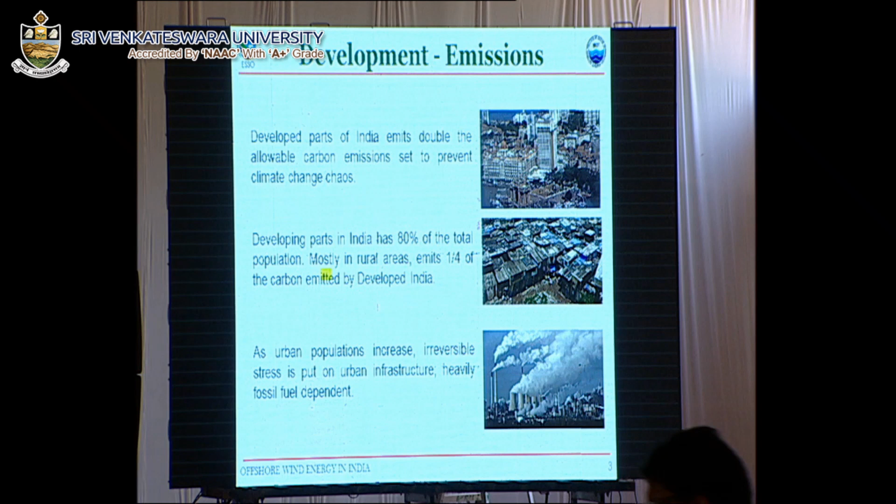This shows the present power scenario in India. We have almost 306 gigawatt. In fact, these numbers are taken from standard reports of MNRE and other places. As far as renewable energy is concerned, we have 44 gigawatt.

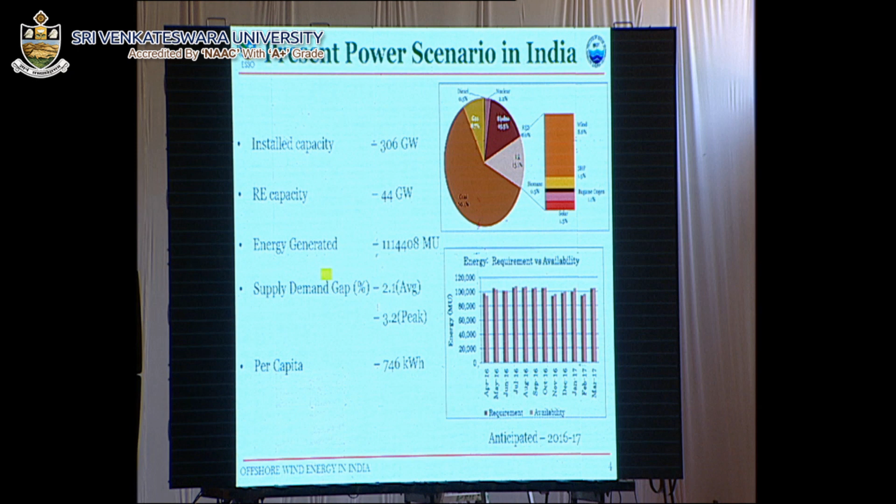But if you see the pie chart on the right, coal contributes maximum, whereas renewable energy comes around 13.4%. Within that 13.4%, wind constitutes 8.6%, small hydel power plants 1.5%, and bagasse cogeneration from sugarcane makes up the rest.

Of course, hydro also is in second place. The per capita estimate we have, I think all taken from there, is 746 kilowatt hour.

Renewable energy is a sustainable energy source that comes from the natural environment. If you see some of the benefits of renewable energy, it exists perpetually and is abundant in the environment, ready to be harnessed, inexhaustible. It is clean and an alternative to fossil fuels. It can be derived from and easily replenished resources.

One important factor for renewable energy - why we need to go for it - is well talked about, whether in the blue economy or elsewhere. A study by IIT Bombay shows clearly from the global climate model that wind intensity has increased over time, showing a positive outlook for how wind will be a great source going forward.

Tamil Nadu's power consumption is very high during summer months, and that's exactly when we get good winds, meeting the major power requirement of Tamil Nadu from wind, especially during summer. Looking at renewable energy capacity, wind constitutes 58%, with solar PV as the major thrust, but wind still plays an important role.

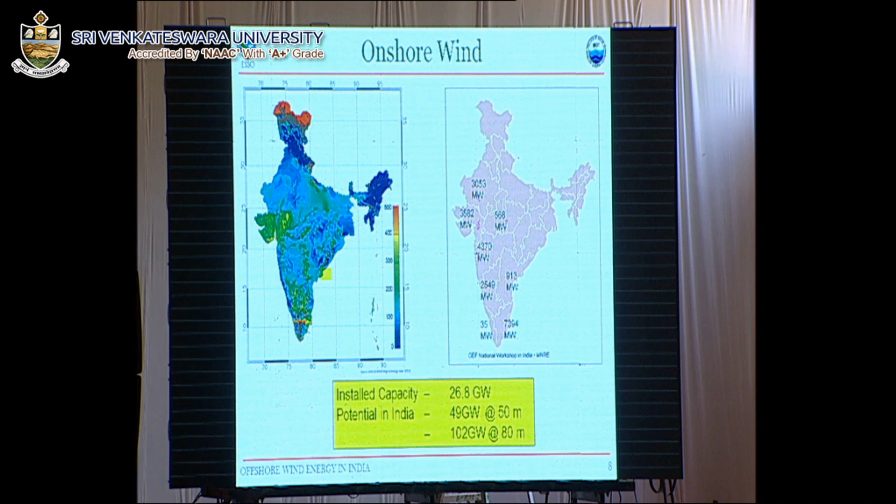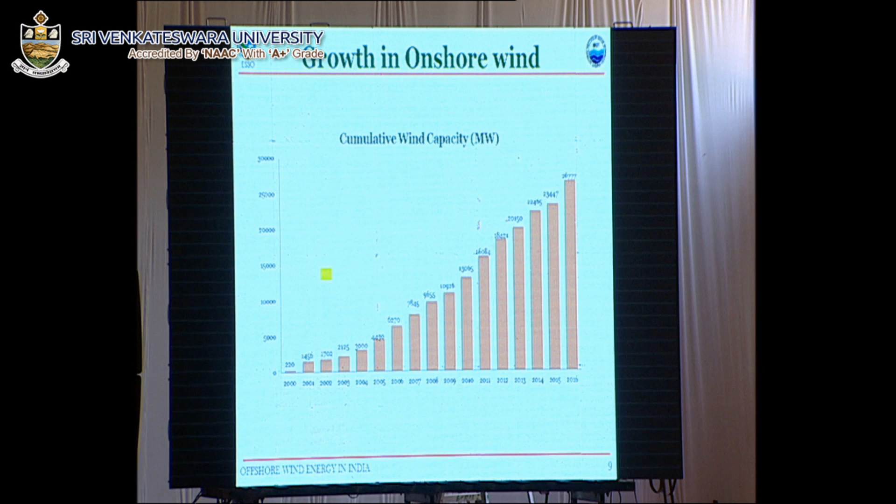Coming to offshore wind - it's already been mentioned that it's less turbulent. One important feature of offshore wind is that it's stronger and more consistent. That's how the plant load factor compares to land - it goes up. Normally the land plant load factor is around 0.25, but offshore it ranges from 45 to 55, showing promising results for offshore wind.

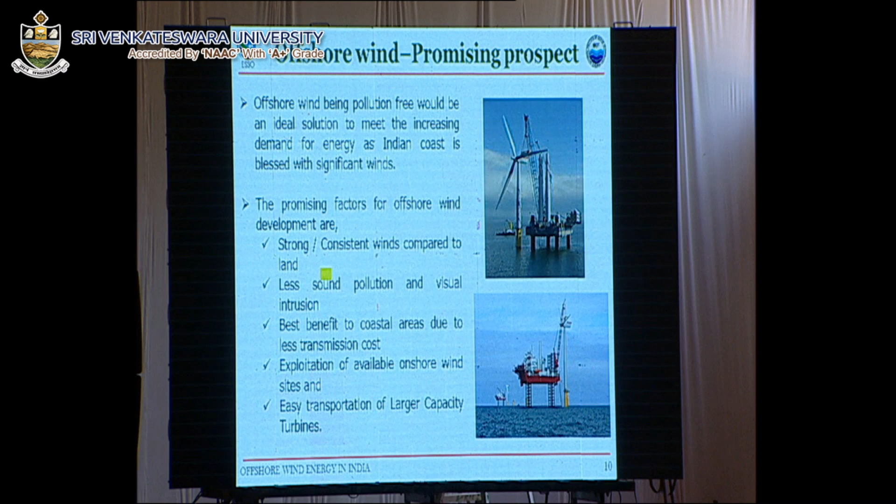What we aim at is that whatever increase in plant load factor we get going from land to offshore, that much cost goes straight into the substructure and evacuation infrastructure. So it's not surprising that offshore wind might seem infeasible - but it is feasible because of this good plant load factor.

Coming to the evolution of offshore wind - like any renewable technology, not just in our country but all countries faced a lot of difficulties at the initial stages. Sweden got the first plant, and the second wind plant came up in Denmark.

Looking at the current status in Europe, they have almost 3 gigawatts installed, but are planning for 63.5 gigawatts. Looking at the UK and the overall pie chart, UK stands first, Germany second, and Denmark third. But India is nowhere in that picture yet - we need to come up with a plan.

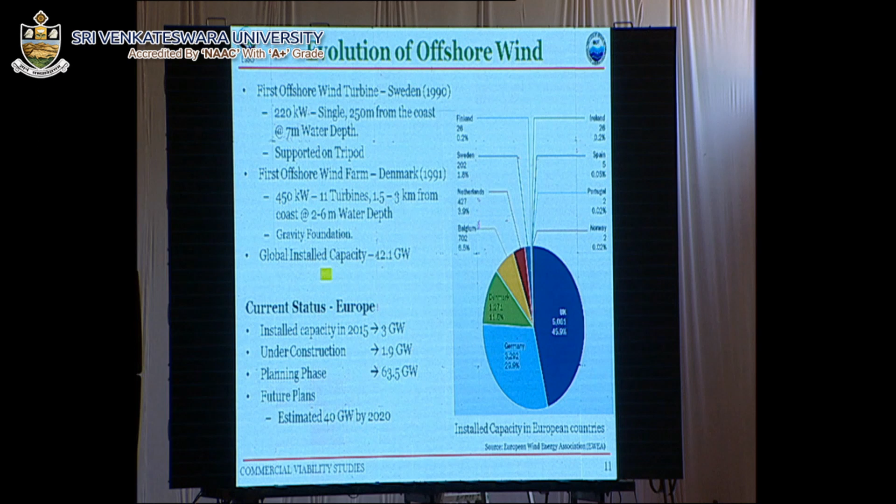Looking at the European scenario from 1992 to 2000, there were no offshore wind farms. In 2000, offshore wind picked up, but unfortunately in 2004 there was a drop in wind hours.

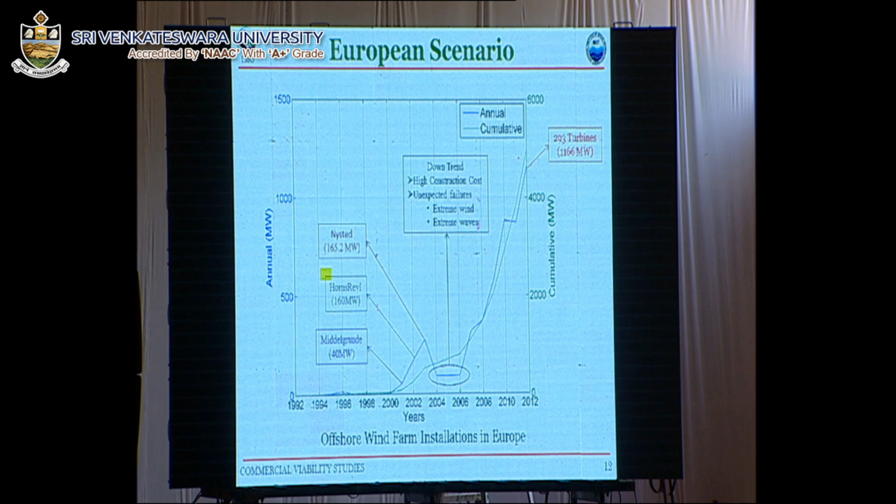If you look at the reasons for high construction cost and unexpected failures from extreme winds and waves, this is where NIOT plays a major role. We can make these things viable if you have a good understanding of the ocean. We have a few institutes in India working on this, including the Ministry of Earth Sciences and the National Institute of Oceanography. If this expertise is brought into the system, offshore wind is going to be a feasible solution.

When you look at the rest of the world, China also has a mega plan for offshore wind, and the United States in a smaller way. India has started with land-based wind, and with NIWE and our collaboration, I think we will definitely come up with offshore wind in the future.

But if you look at total installed capacity in India, 67% goes to coal, whereas 20% goes to hydro, and only 8% goes to wind. I think this needs to be improved in the future depending on technology improvement.

This is the offshore wind map which Dr. Katyal has already shown, from our sister institute INCOIS, the National Center for Ocean Information Services. That is the starting map. What we do here is analyze buoy observations in the sea along with scatterometer data, and these potential maps are prepared.

In general it more or less agrees with whatever measurements have been taken up by NIWE at several places. That's how we have gone for the pilot installation of offshore wind masts.

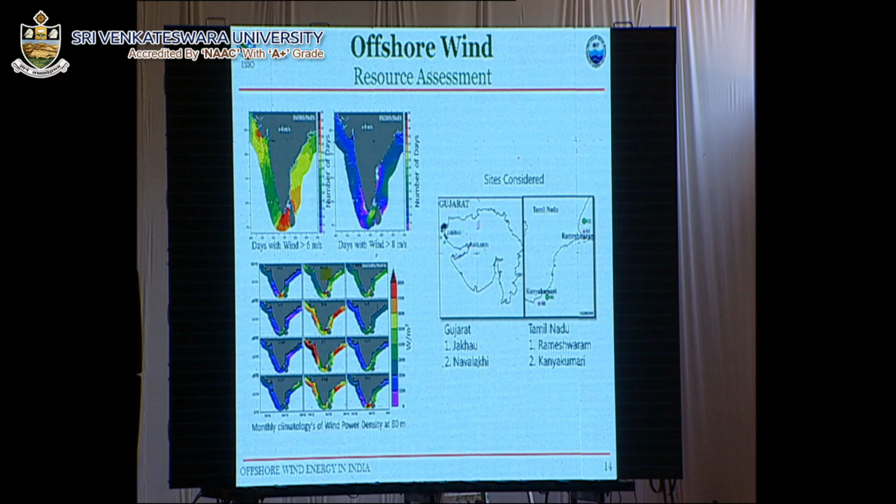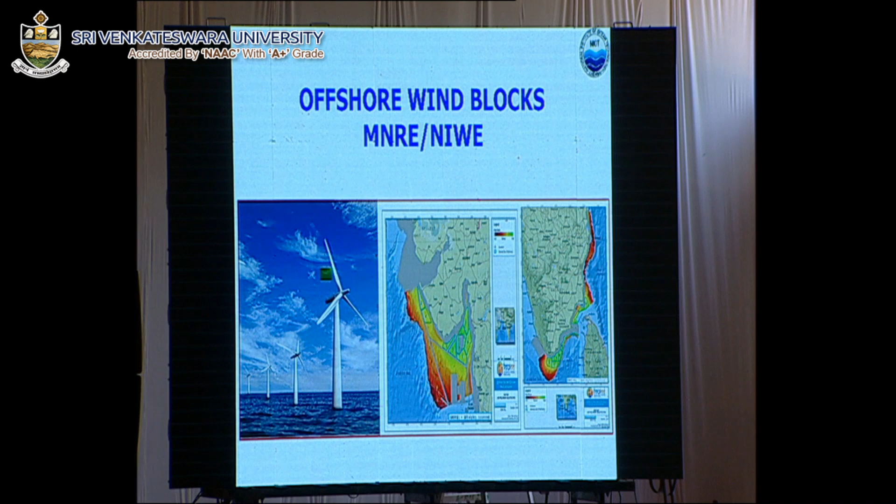I skipped this block which was already covered by MNRE and NIWE, who are the custodians of these things. I think they allocate the blocks and monitor them, and they have a very good single window system for clearance of offshore wind projects. In fact, Dr. Katyal is the head of the offshore division in MNRE.

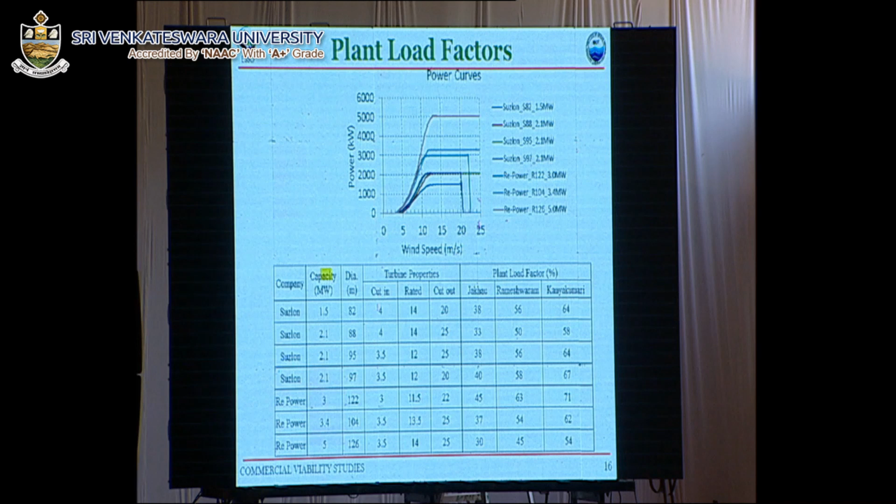Coming to the plant load factor, this was a standard question asked by many people. We took some turbines and tried to analyze the plant load factor for offshore wind. I can show here capacities ranging from 1.5 to 5 megawatts and the cut-in and rated speed for each.

We looked at the plant load factor for each site, Rameswaram and Kanyakumari. Since Tamil Nadu has the highest potential, we analyzed Rameswaram and Kanyakumari in Tamil Nadu. Jakhau is the place in Gujarat. These sites have been analyzed.

Once we come to that, he already mentioned the wind speed he gets for Tamil Nadu, around 8 meters per second average wind speed. What we estimated before the data was there is around 7.5, so more or less the secondary data we use agrees with that. If you look at Kanyakumari, it goes up to 9, so Kanyakumari offshore wind turbines are definitely going to be more feasible.

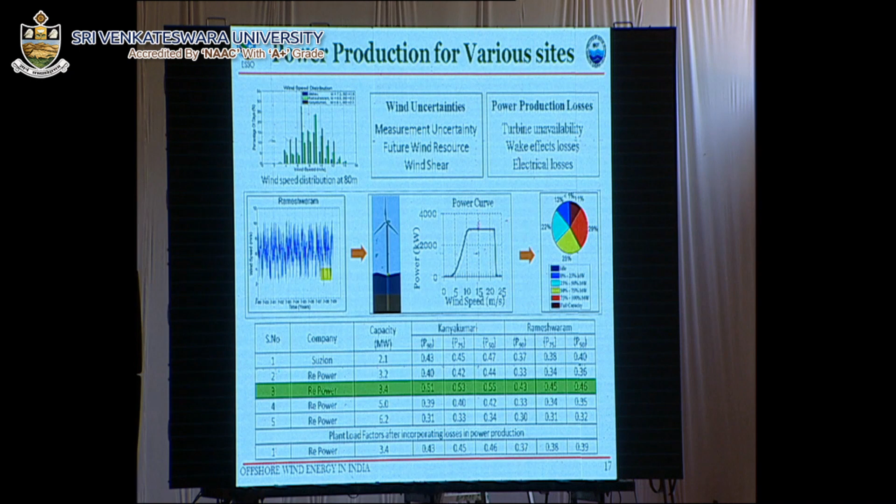But of course, we also have a construction cost slightly higher compared to Rameswaram at Kanyakumari. When we estimate this, we take all systematic procedures of wind uncertainties into account, including measurement uncertainty, failure of future wind resources and wind shear, and also power production losses.

If you look at the bottom picture highlighted in green, it shows the plant load factor is somewhere around 0.5 for Kanyakumari, and for Rameswaram it's 0.45, which clearly agrees with Dr. Katyal's actual measurements.

Coming to the cost, how do we work this out? For offshore wind, the superstructure includes the turbine and installation, the substructure includes foundation and installation which is quite expensive, that's where we have to bring down our cost. Then there's electrical equipment, already mentioned collection system, integration and transmission, and finally development, permits, and operation and maintenance.

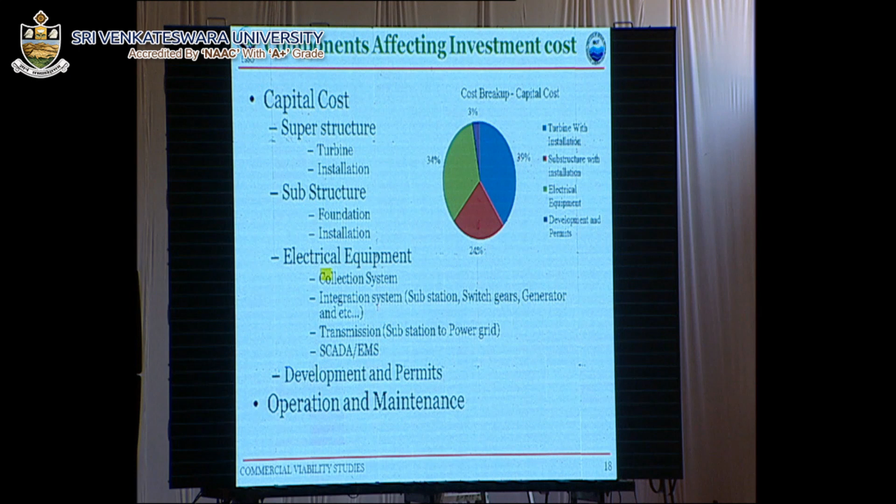If you look at the right side picture showing components of capital cost for offshore wind, 39% goes to the turbine, 24% goes to the substructure which can increase up to 30% depending on the site, and 34% goes to electrical equipment. This can also be cut down drastically if you have good installation techniques.

One of our experiences with Gujarat Tower is that the material cost is only 30%, but installation cost is 70%, which clearly shows that if you bring down installation cost, offshore wind is definitely going to be a promising resource for the future.

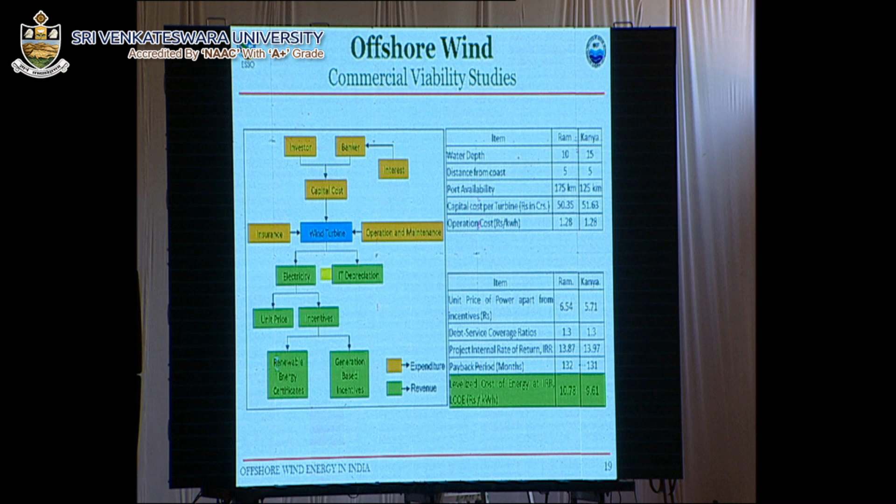Coming to the commercial model, someone was asking what has been done for that. We have taken this business model - the yellow or magenta shows investment, and revenue is in green. The investor puts in capital, then a banker comes in with interest, giving you a capital cost. Insurance is one of the players, and then operation and maintenance cost is added to that.

At the bottom you have revenue - unit price, and incentives offered by the MNRE, whether it's renewable energy certificate, generation based incentive, or accelerated depreciation, which is available to many companies.

In fact, the private company's interest is basically to have a carbon credit. For that they want to go for offshore wind. That is the first starting point for any wind turbine you are going to install.

We worked out some costs, and the levelized cost comes to around 10.73 for Rameswaram, and Kanyakumari is around 9.61. This is a crude estimate from the first level of study, but it will definitely come down in the future. Dr. Katyal was mentioning about 13, but I am slightly on the lower side because we have confidence of installing it at lesser cost compared to what has been done at other places.

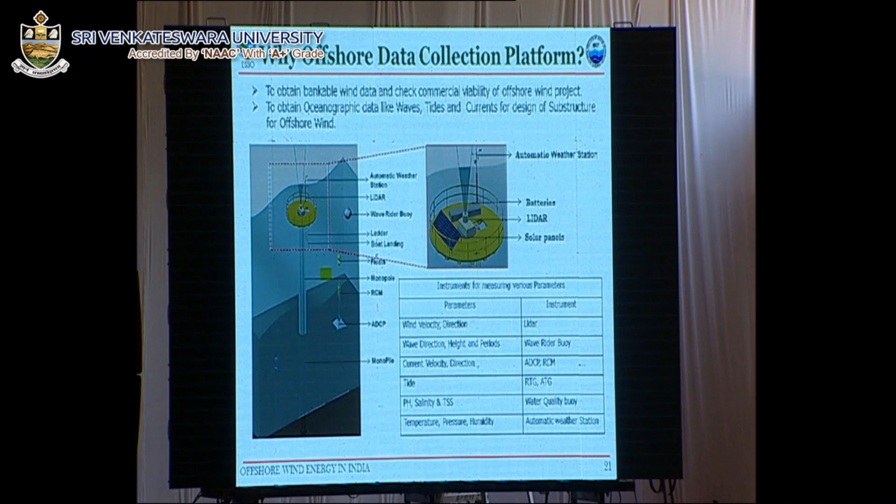Now NIWE is at that place. Actually, we are working closely with NIWE as well as with Suzlon on both the places. Suzlon is installing their own turbine in Gulf of Kutch, whereas NIWE is installing in Gulf of Khambhat.

Coming to the blocks, they have an ambitious plan of installation of these towers in both Tamil Nadu and Gujarat at many places. Right now we are attacking only Gujarat, but later it will come to Tamil Nadu, which Dr. Katiyal has already shown.

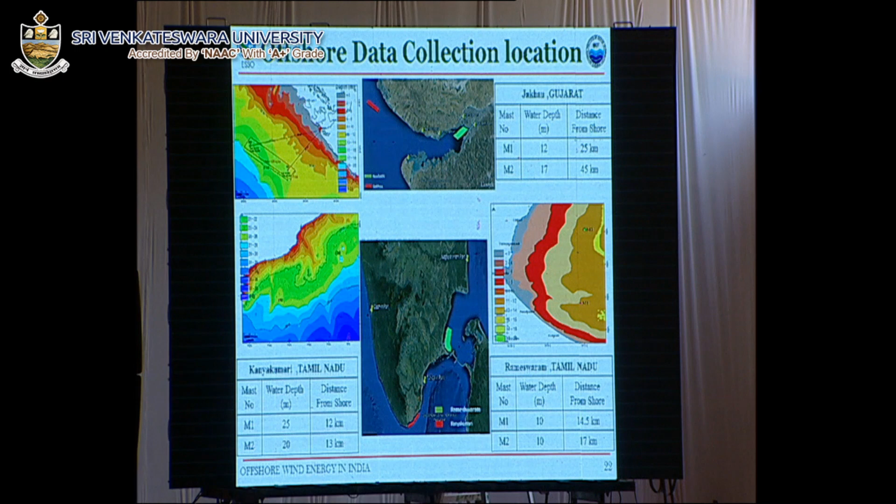If you look at Gulf of Kutch, the proposed platform will be at Jakhau, where the water depth is around 15 meters, and it is 16 kilometers from the coast. That means you have to travel almost 16 kilometers from the coast to reach the tower. Similarly in Gulf of Khambhat, it is 23 kilometers from the coast, and you can imagine what kind of challenges you have to face once you install structures in the deep sea. So we have done all this exercise.

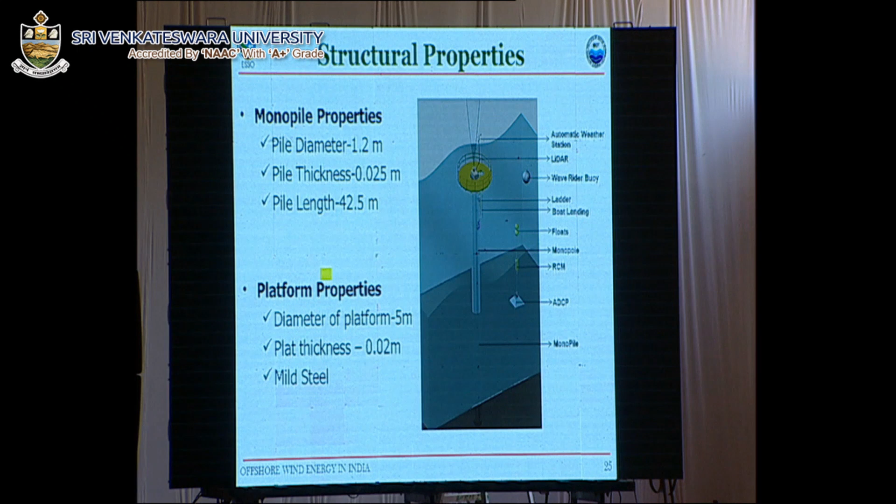This shows the final properties of the monopile, having a diameter of 1.2 meters, thickness of 25 mm, and pile length of around 42.5 meters. The diameter of the platform is also given at the bottom.

Along with measuring the wind, we also measure sea surface parameters like waves, tides, currents, and other oceanographic parameters required for the design of the structure. Whenever we design structures in the sea, we need to analyze for normal conditions as well as extreme conditions. That's where many offshore projects are challenging, since whenever you have a cyclone you get extreme loading, and those things have to be designed carefully. That's how this data is required.

One good thing is that the Ministry of Earth Sciences has a very good database on the Indian coast, so that we have better confidence in our oceans, and the cost can be brought down significantly.

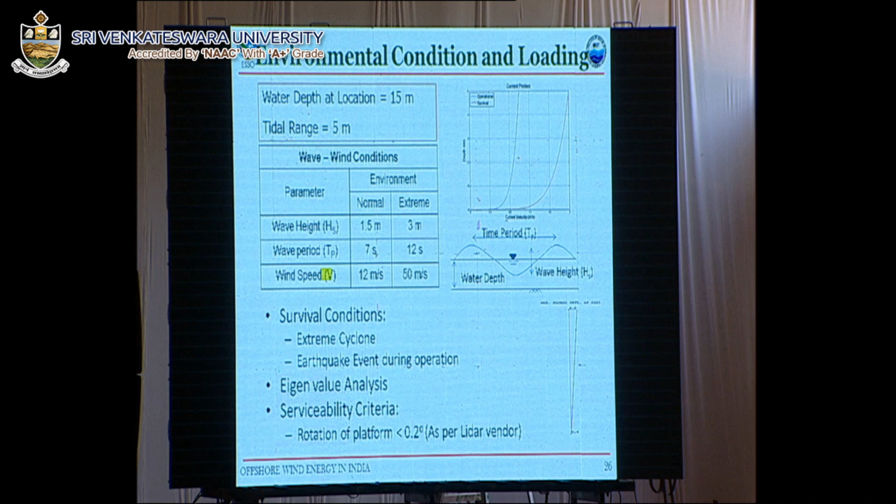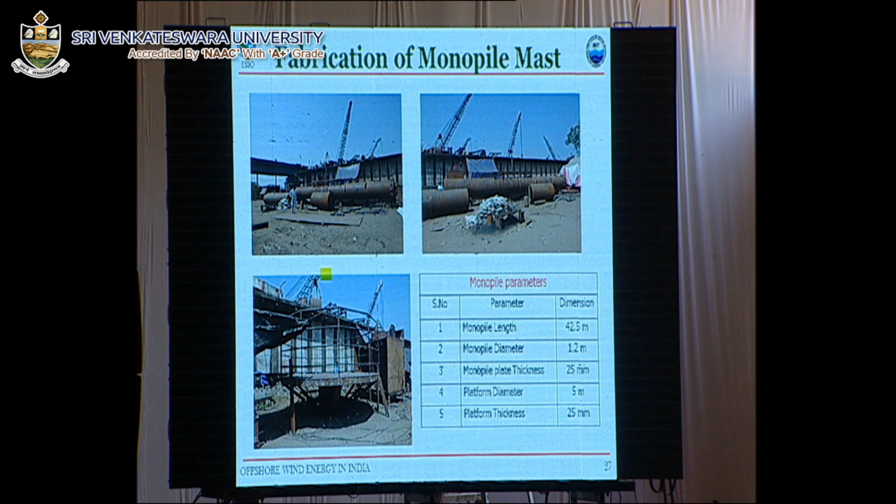This shows a picture which was already shown by Dr. Katiyal. We were also there when we were going for that. As he said, except for the last picture, all those things were there. We have been assisting right from the design to environmental clearance, every part, for this monopile.

This shows the final configuration of the monopile for measuring the wind profile, with a platform on top fitted with a solar panel. Everything is designed in-house, and this contractor is also a local contractor.

This whole project cost is somewhere around 3.6 crore for the installation of the entire lidar-based platform in the deep sea. Out of that, only 2 crore goes only for the installation, and the balance is the material cost.

The substructure components which need to be designed for offshore wind are as follows: whenever we are in shallow water, we can use the foundation called gravity foundation, which simply rests on the seabed. Once you go to deep sea, you need to go into the seabed, where the monopile comes into the picture.

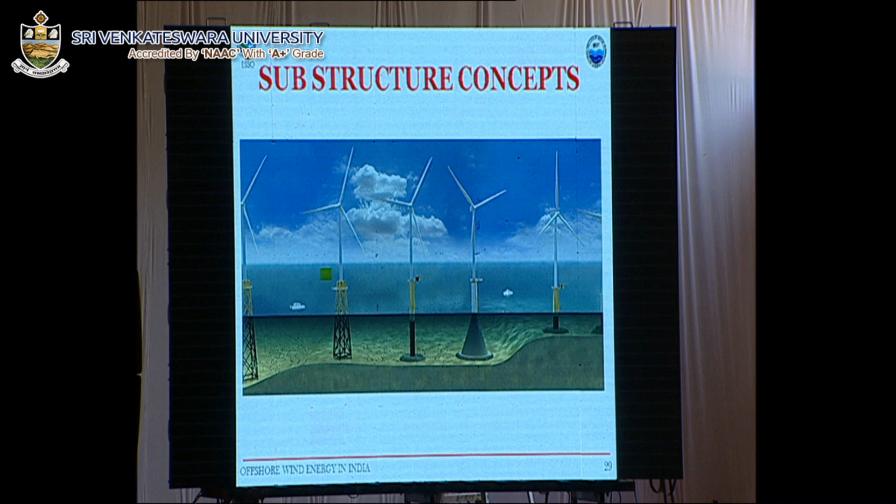Once you go offshore to a water depth of more than 70 meters, ONGC normally installs the platform called jacket platforms. That is where it is normally installed. Once you go into the deep sea, you need to have floating platforms, and NIOT also has expertise in designing those.

But these are all long-term plans. Right now what we are attacking is only up to 30 to 40 meters depth. All the technology is available, and NIOT is confident with those things.

This shows the different foundations needed for Rameswaram, because the water depth is somewhere around 5 to 20 meters. The soil condition is somewhere around sand to silt, and we have a moderate environment, not a severe one. Since it is an enclosed area, the foundations preferred are gravity type or monopile.

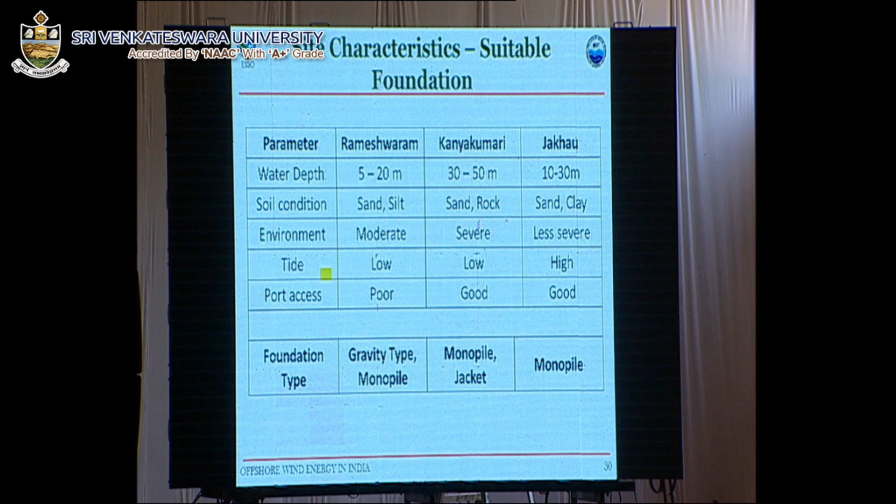Whereas in Kanyakumari, you need to have a monopile and jacket, because you have slightly rough conditions in the sea. In Jakhau, it is exactly in the Gulf area where we have strong tidal currents, so a monopile is preferred for that.

This clearly shows that all the exercise has been done by us on what kind of foundation is required for each and every place.

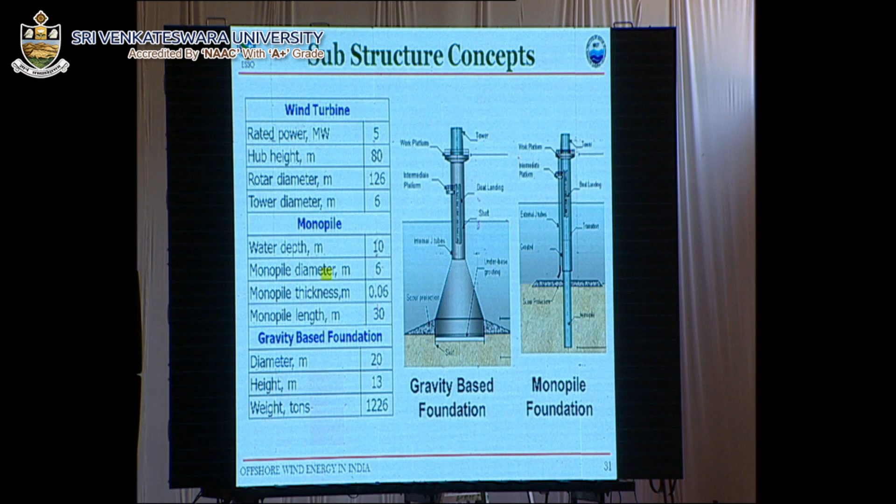For the future, I think the initial one planned is a 5 megawatt turbine, with hub height somewhere around 80 meters and rotor diameter of 126 meters. Similarly, for the monopile, the water depth is around 10 meters, and these are some of the things arrived at based on the 5 megawatt turbine.

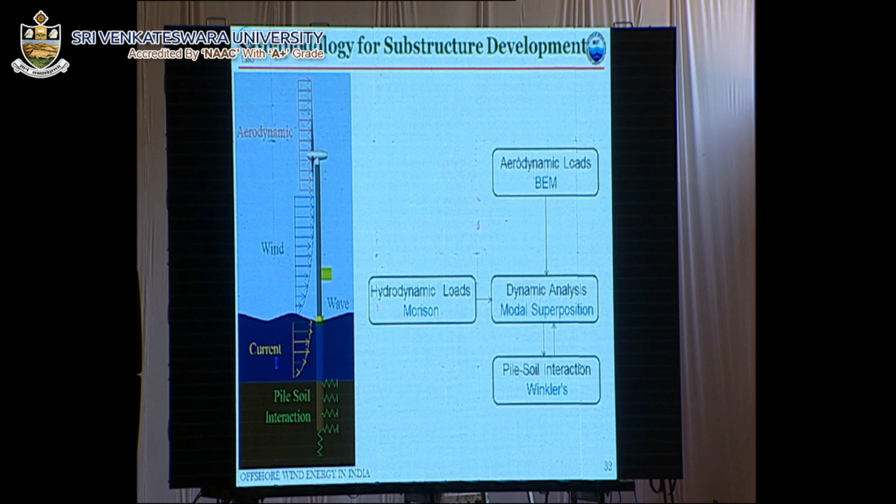Once we come to what loads we need to account for in the design of the structures, that includes aerodynamic loads. Technology has now developed to such an extent that we can design for all these loads, and turbines are also classified accordingly, so there are no surprises.

For wind load, we have to account for the entire tower, and we have complete expertise within the country for that, along with current forces on the structure, wave loads, and finally the pile-soil interaction. Once we drive the pile into the deep sea, you need to analyze the pile structure for that.

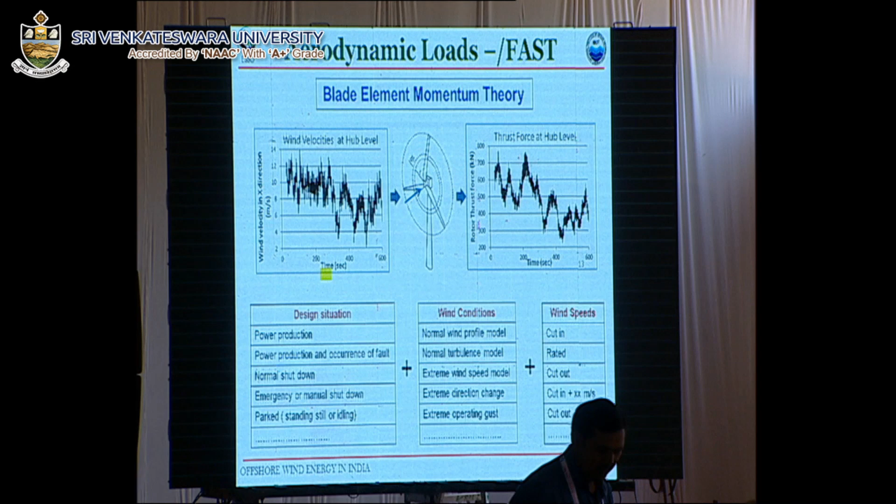This shows wind velocities, how it acts on the hub, and then what is the force which is generated on the turbine for the design of structure. Everything has been done in-house, and these things are available with that.

This shows the peak load and then thrust force which is acting for the Indian conditions, not for the foreign condition. All this data is for the Indian condition.

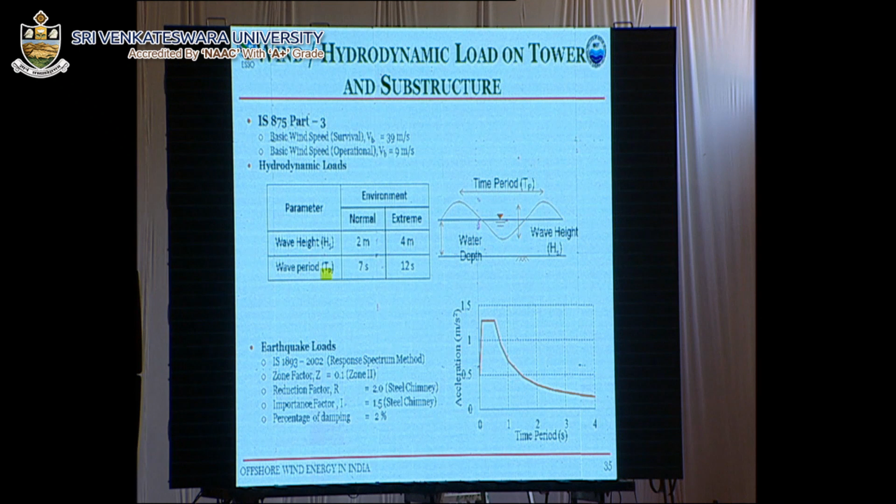Coming to the substructure design, once we are designing for the Gujarat coast, we also need to account for the earthquake loading. Those things have also been done, and that slightly changes this cost.

Coming to the soil interaction, the entire soil profile up to 30 meters below the seabed is required for analysis of the structure. The data needs to be collected and analyzed, and the pile has to be designed for that condition.

Once we do that, we design normally all the structures on the land. We need not have to worry about the dynamic analysis for whatever structure we design, but in the ocean, we need to analyze for the dynamic analysis.

Whenever we do dynamic analysis, the frequency of the structure and the frequency of the wave forces should never match. So you should design in such a way that they are out of phase. Then only you don't have resonance.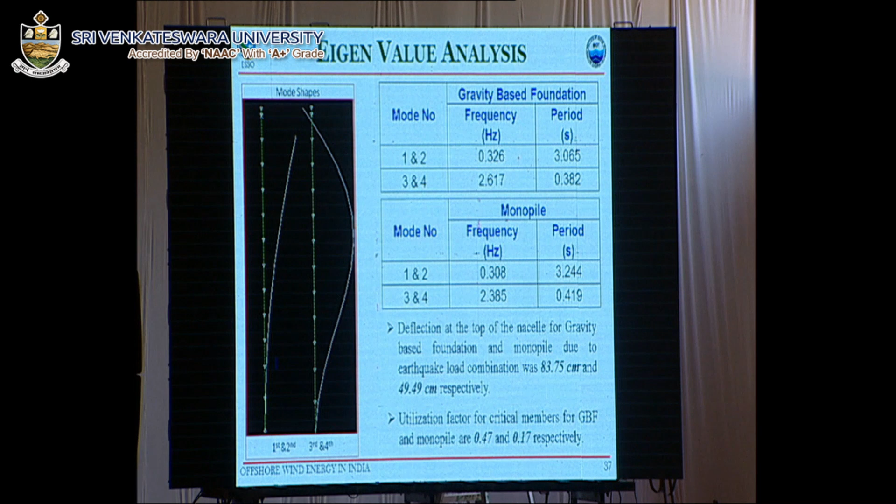I think many of you are already aware about resonance. If both frequencies match together, you will get resonance and the structure will fail. That careful analysis has also been done for the offshore structures for the wind.

This shows how the monopile, right from 2002 to 2018, has evolved. Lot of technological improvements have been done. Now there is clearly shown how the cost can be brought down in offshore wind.

Like someone was asking, in the long run offshore wind is going to be feasible. Once your technology improves and your confidence increases, definitely your cost will come down without any difficulty. Even a classic case of solar PV - what was the cost at the beginning, what is the cost now - clearly shows that with improvement of technology over time, the cost will definitely come down.

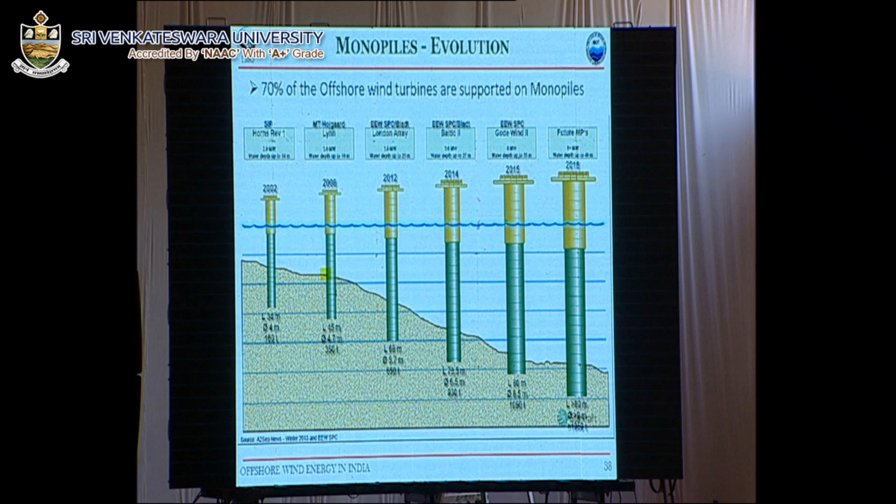That's why my initial inference is that government should have incentives at the beginning stage to promote this offshore wind. Later on, automatically without incentives itself, it will become self-sustainable.

This shows the installation. One of the major threats for offshore wind is we don't have good offshore vessels to take and put it on the system. Each offshore vessel is very expensive. So we need to design a vessel for our own condition that will bring down the cost drastically.

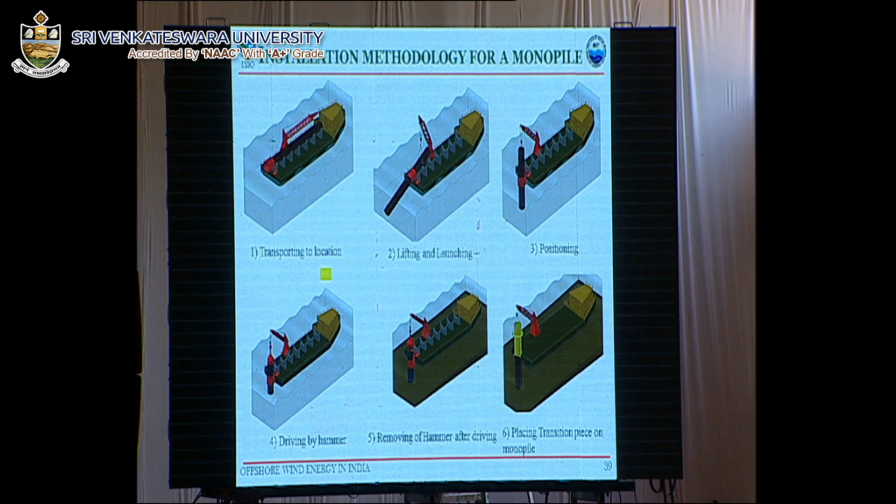That's what NIOT is working on - design of this kind of vessels, movements and all those things. This picture shows how we transport the monopile from the barge, lifting and launching and positioning, and finally driving with the hammer.

So instead of concentrating on the actual R&D, we found that since 70% of the cost is going only for the installation, let us concentrate more on the installation so that you can bring down the cost and make the project viable. That's how this has been worked out.

Then coming to the gravity based foundation - if you start looking at the bottom, whenever you take a gravity based foundation in the sea, you have to analyze, like a ship, all the motions of the foundation which should not sink. That requires careful analysis.

All the analysis has been done, and finally, especially for Rameswaram, you are envisaging only gravity based foundation. Once you do the gravity based foundation, you will get the cost almost 50% of what has been done for other places.

Here the bottom one shows for that. If a monopile costs somewhere around 7.8 crores, the gravity-based foundation will cost only 4.3 crores, which shows a 50% reduction in cost, if you adopt a suitable foundation.

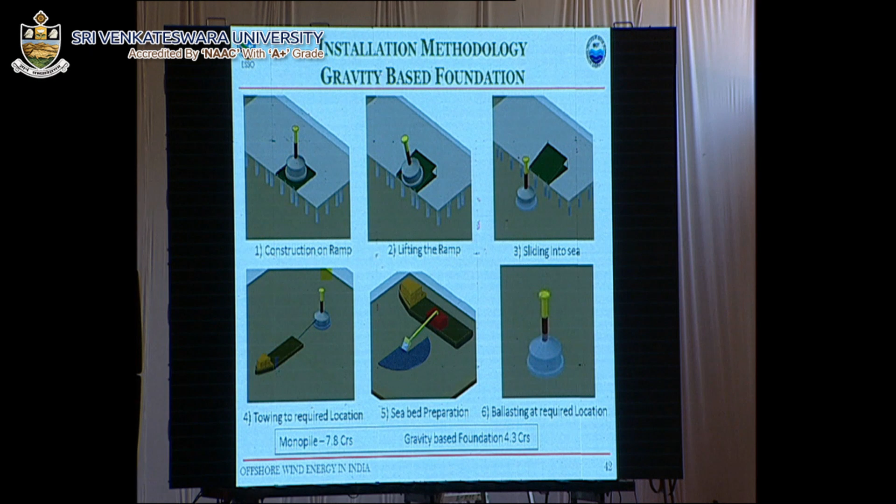This is where you need to do a lot of R&D. The pictures were also shown, how we put it on the ramp, lift it, slide it into the sea and finally launch it in place. These are some of the capabilities of NIOT for offshore work.

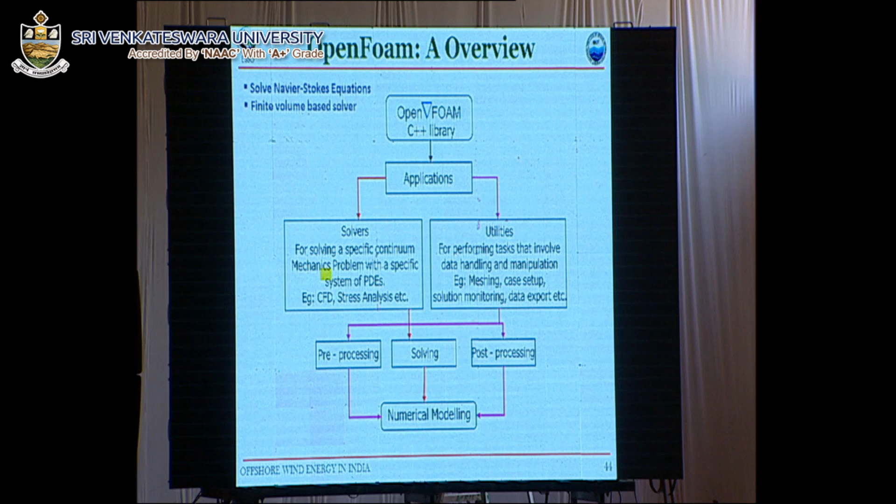We have complete numerical modeling tools and expertise in the field to launch everything. This shows how the loading on the monopile has been analyzed using a numerical tank, generating everything from the numerical simulation, and then the load on the pile is estimated.

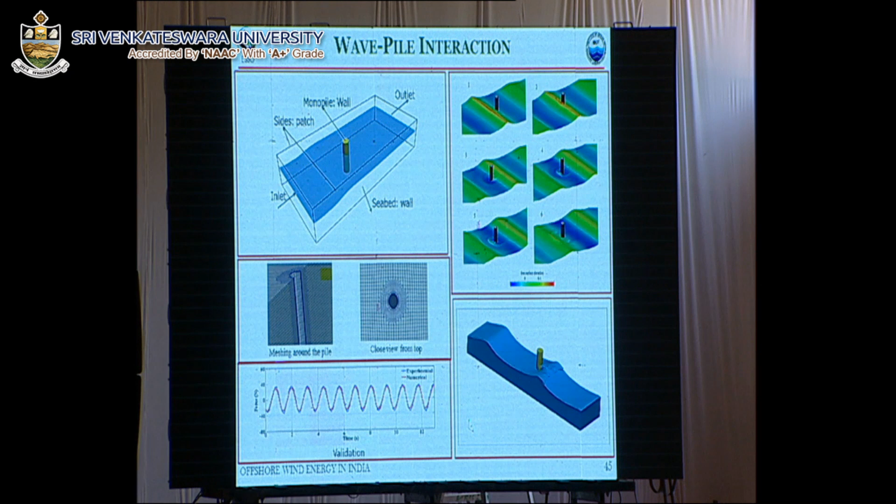If you don't have this kind of information, you design a conservative design and the cost is going to be higher. So that expertise is required within the country to optimize the cost.

Similarly, piles, whatever ONGC is designing, have a jacket leg of only 2 meters diameter. That cannot be straight away applied to offshore wind. You need your own design to be analyzed for that, and that has been done by NIOT.

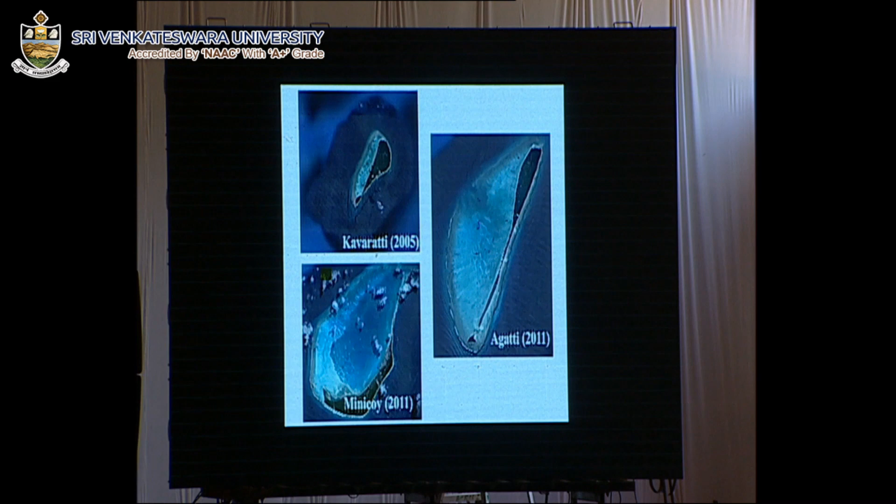This is the video of what we designed for the island. Someone was talking about the island for the desalination plant. Normally it costs somewhere around 30 to 40 crores, but we did everything in 15 crores using local technology and on-site design for the desalination plant. A similar approach can be adopted for offshore wind.

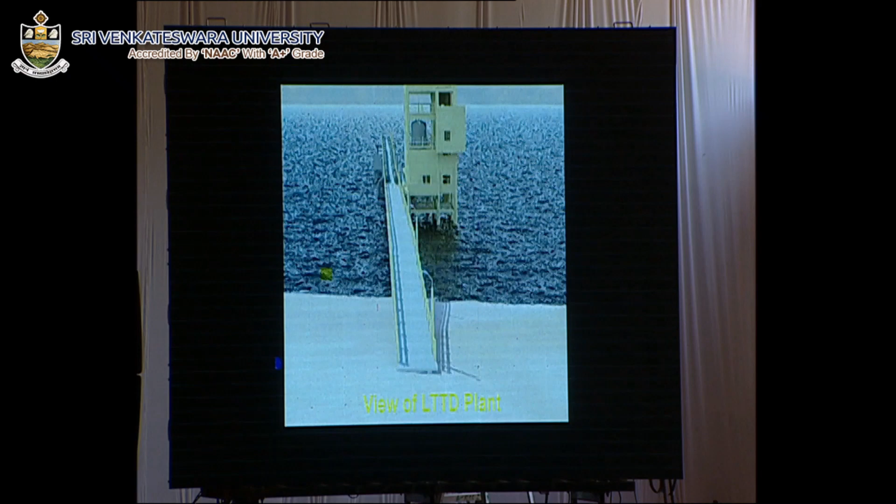This is the wave we get in the islands. All these structures need to be analyzed for that. Everything, design and installation, is done in-house by NIOT, not by any international consultant. This is the wave loading there.

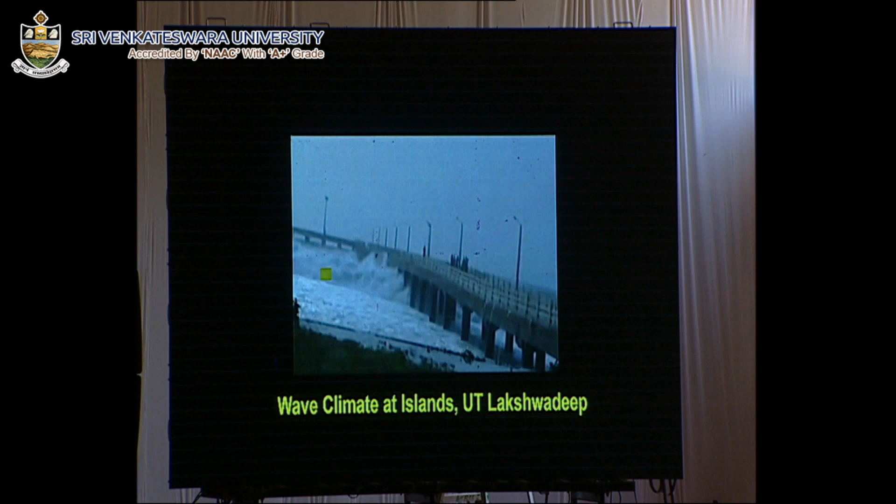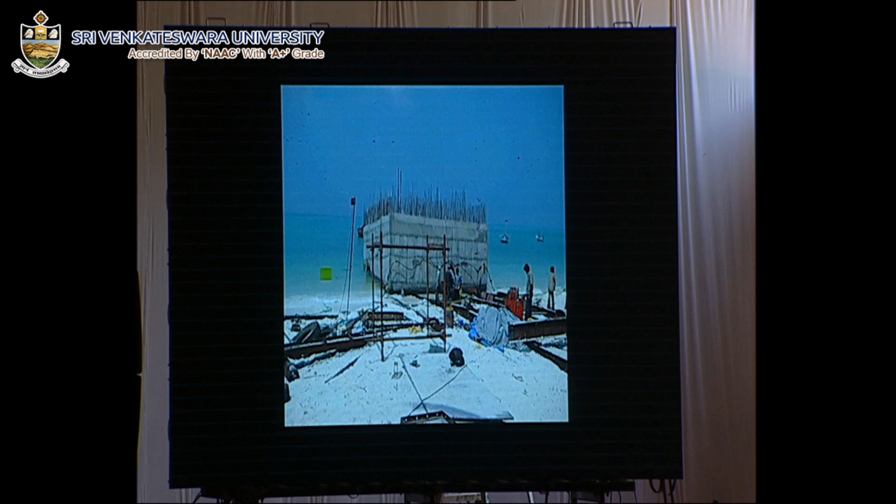This is a bridge to draw the pipeline. This is the concrete caisson of 12 meters by 8. You may be surprised to know this was floated in the water like a ship and taken to the other side. That's how it was cast in the lagoon and pushed into the lagoon slowly without any heavy equipment.

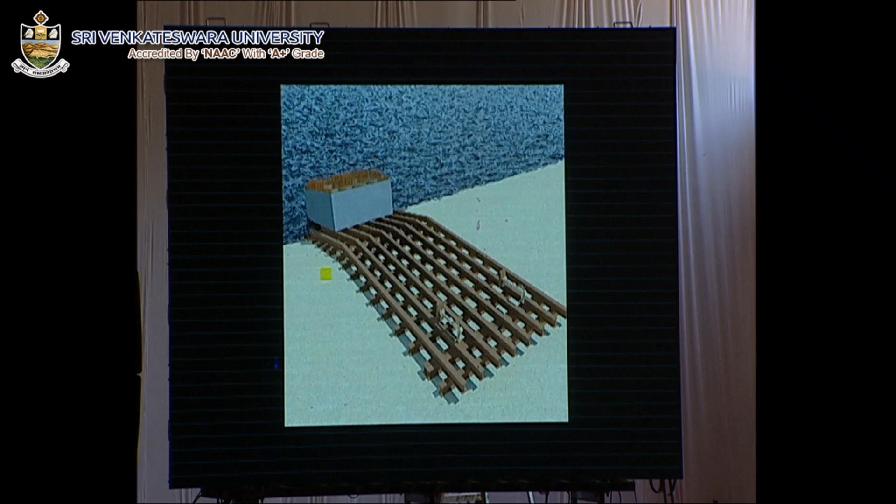Now it is floated there. The entire technique is based on the simple principle of Archimedes, and then 15 kilometers into the deep sea it was taken with a simple tugboat, you can see here it is floating. It is a concrete one, not a wooden one, having a weight of somewhere around 500 tons.

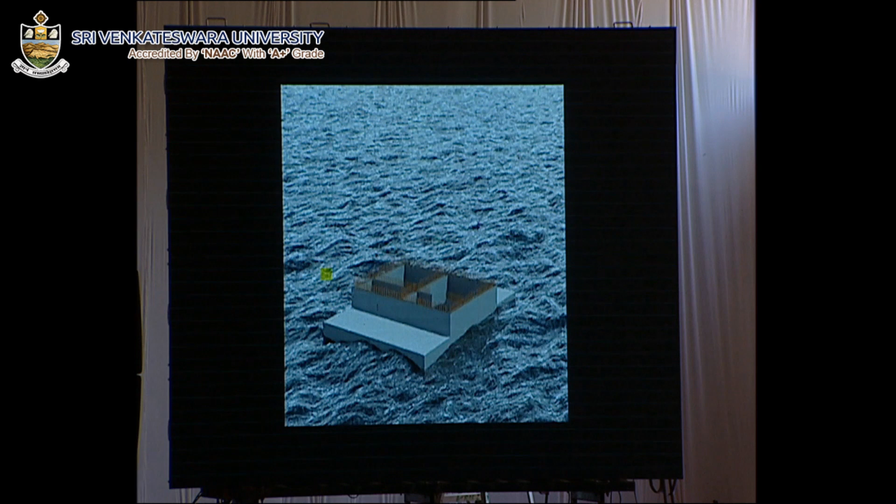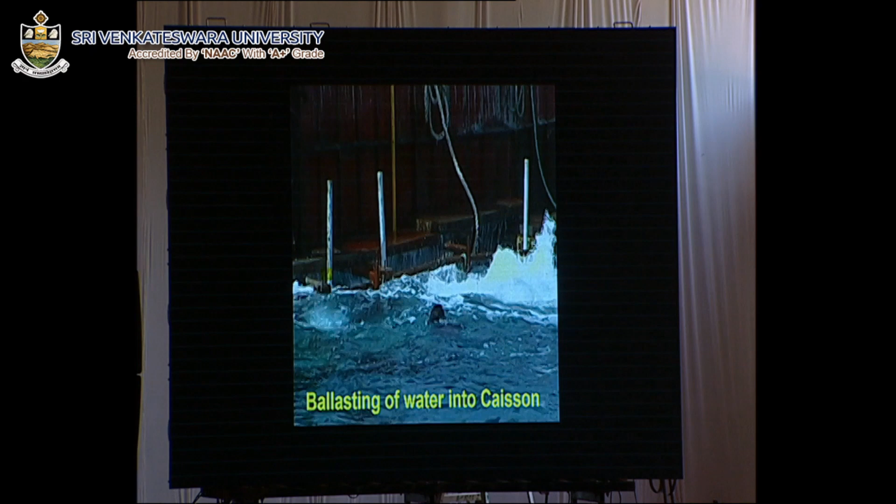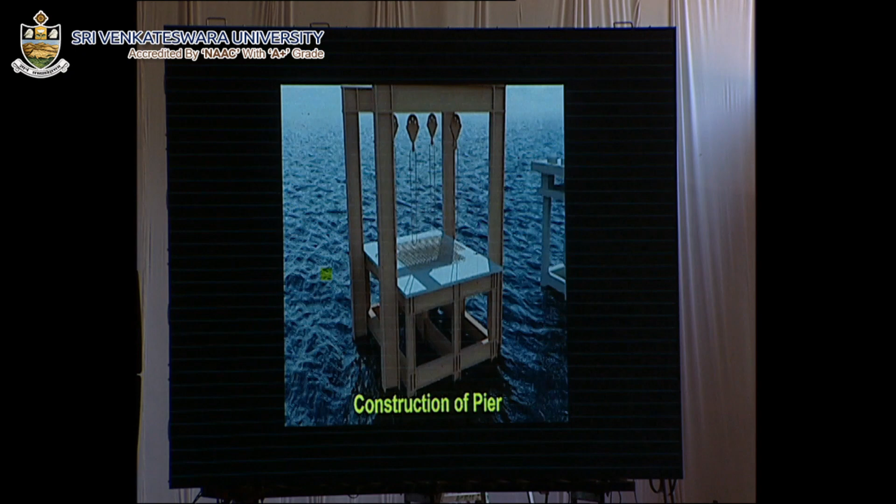Finally, this caisson was brought to the site and then lowered using water filled into it. This shows how the structures have been built within the sea.

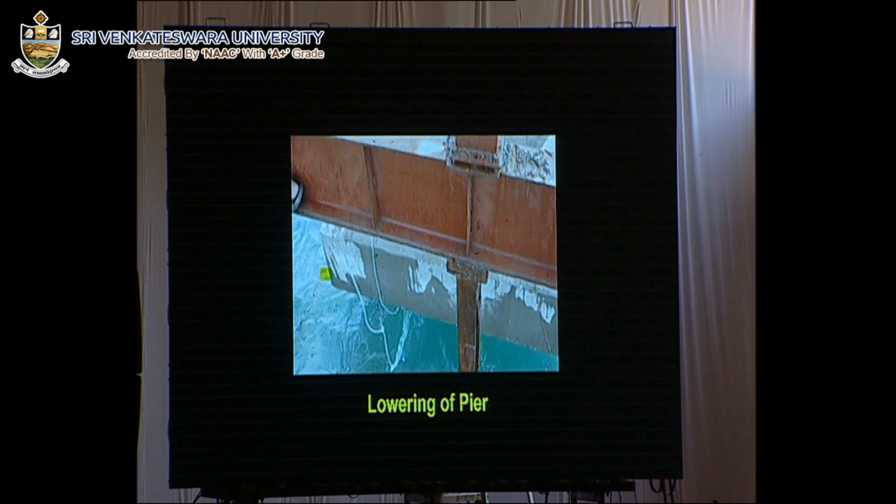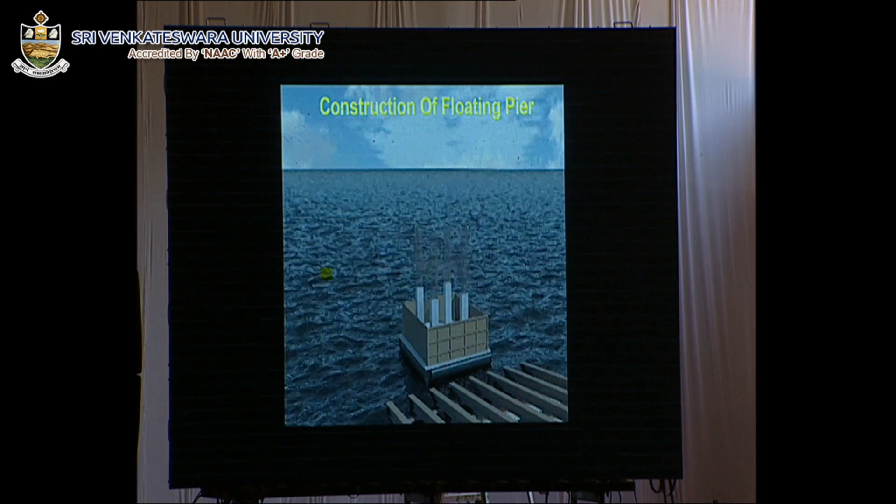This is a sequence of construction activities which were done for these caissons. Why I am showing this video is, if you don't see this video, you don't understand how it's done elsewhere. Techniques used in other places are quite expensive, but if you adapt your own techniques within Indian conditions, that cost can be brought down subsequently.

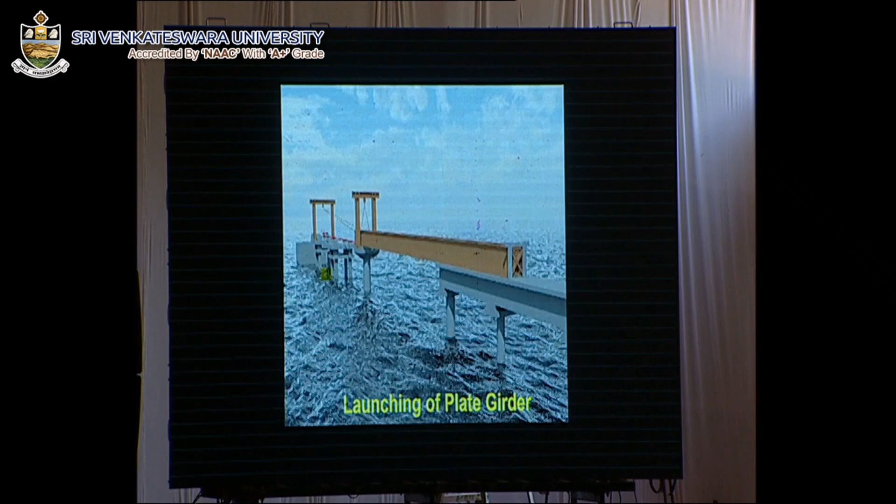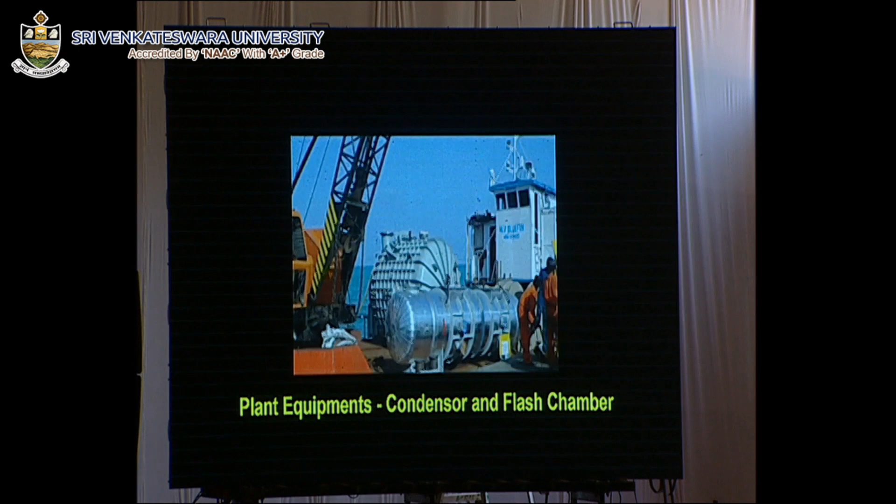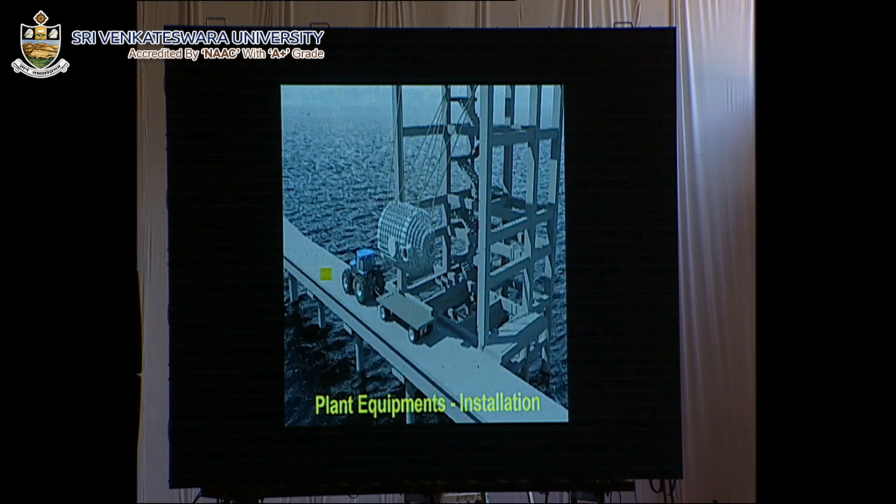These are all launched using only simple rollers onto the desalination plant. The intake structure, which was in the deep sea at somewhere around 6 meters water depth, had all equipment installed without much heavy crane. There are no cranes used; simple chain pulley blocks were used to lower it.

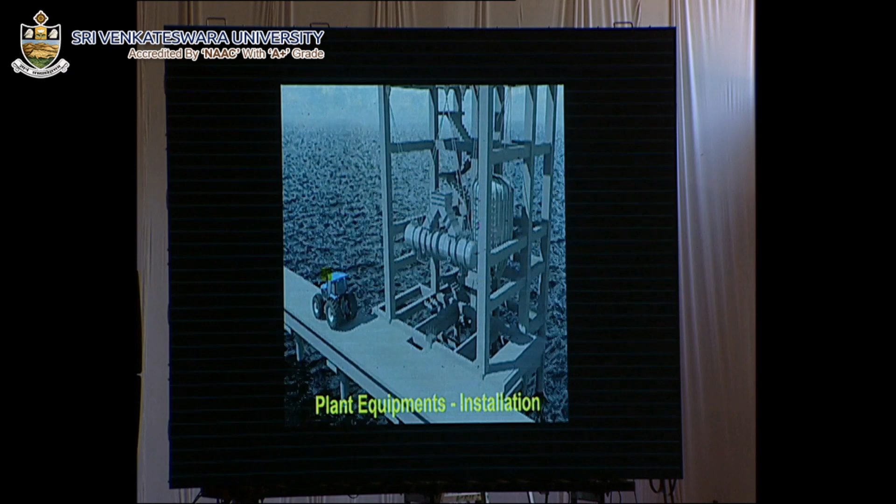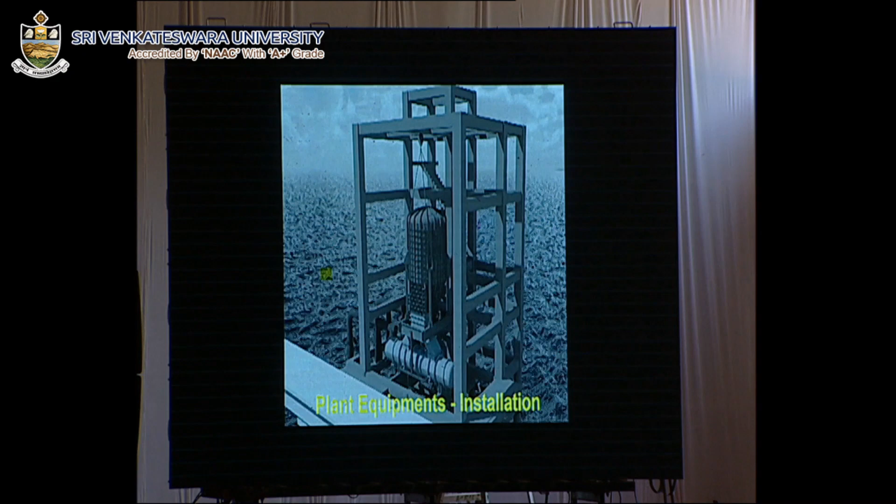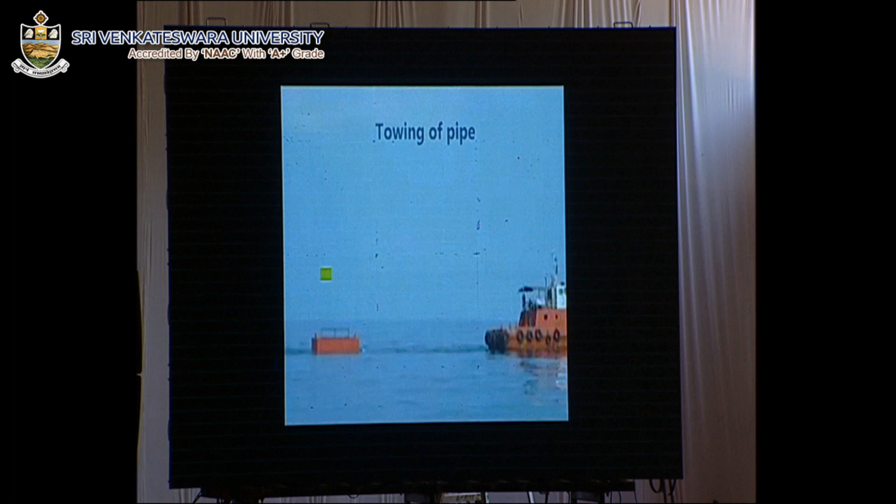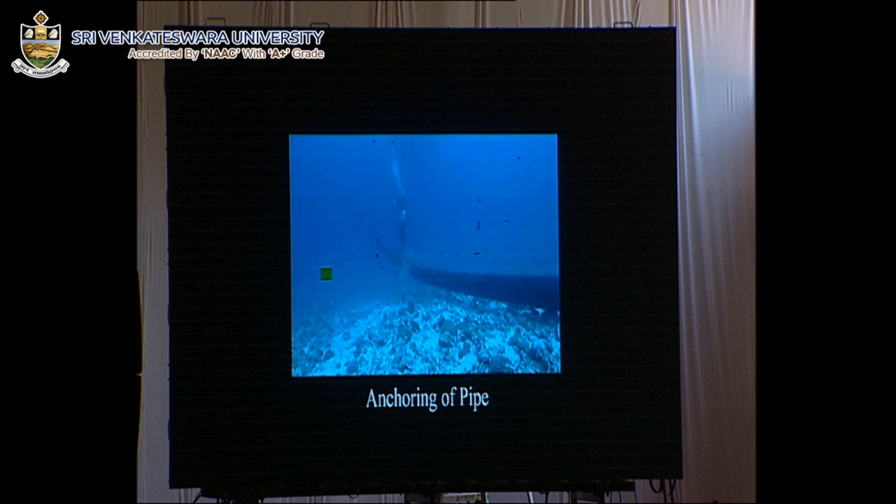Even the pipeline, similar to laying submarine cables for evacuation, NIOT has all this expertise. Everything was done in-house, then floated and taken to the site. This is laying of submarine pipeline at a water depth of 350 meters into the deep sea. This is underwater positioning, keeping the blocks on top to force against the currents. These are all trained divers by NIOT to fix the underwater installations.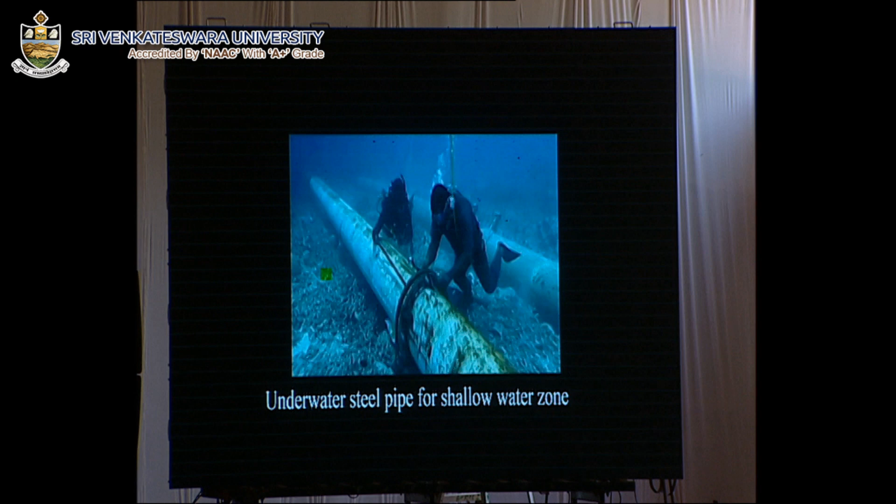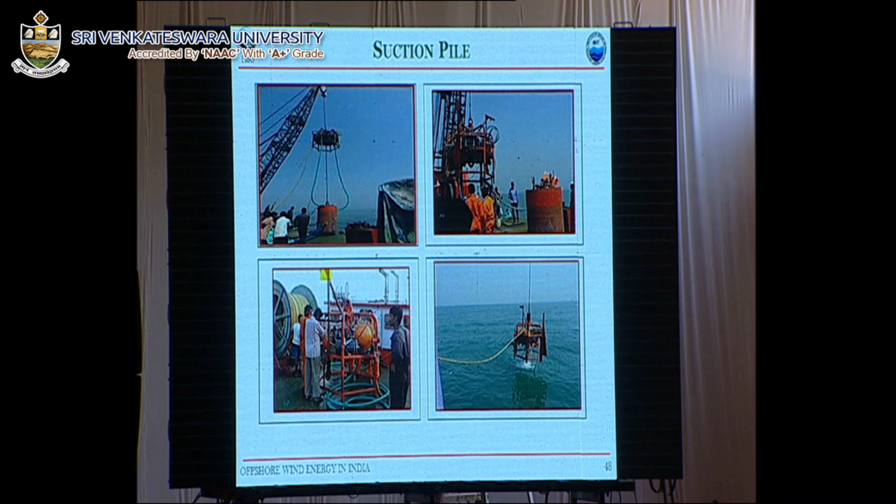That's how it has been done for the island, and the same thing can be applied for offshore wind, which definitely brings down the cost. We also have expertise for offshore installation of some of the foundations, everything for that.

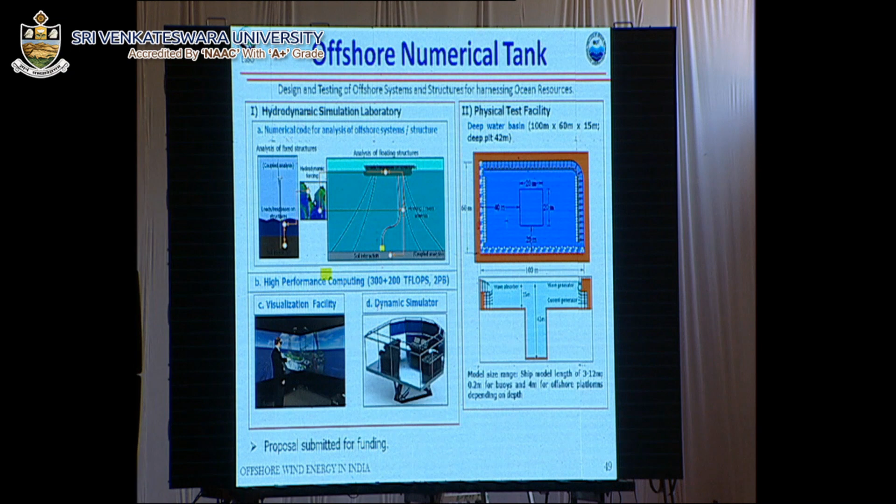So we have a long plan to build such facilities within the Ministry of Earth Sciences called the offshore numerical tank. This hydrodynamic simulation laboratory will simulate ocean conditions in a visualized room, like a real-time simulator, a flight simulator and all those things. You can have everything within controlled conditions, and then we have a big physical basin facility to test all the offshore installations. Such capabilities will be available within the Ministry of Earth Sciences.

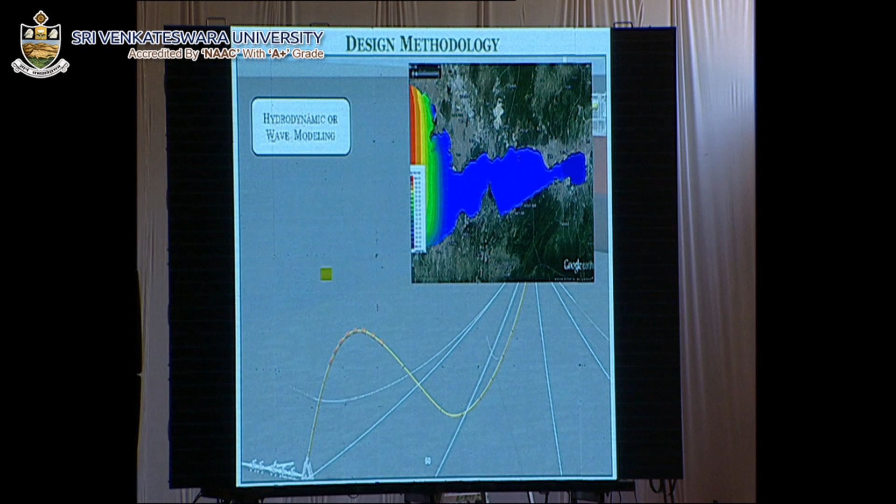This shows, once we wanted to have a loading, how the wave comes and hits the structure. Then you go and analyze the loading on any structure which is there in the deep sea.

Then come to the ship motions, which we analyze for the floating structures. Then finally the mooring of the ships for the floating structures. Finally all these things are analyzed completely in a non-linear way, so that all uncertainties are seen before design of the structure.

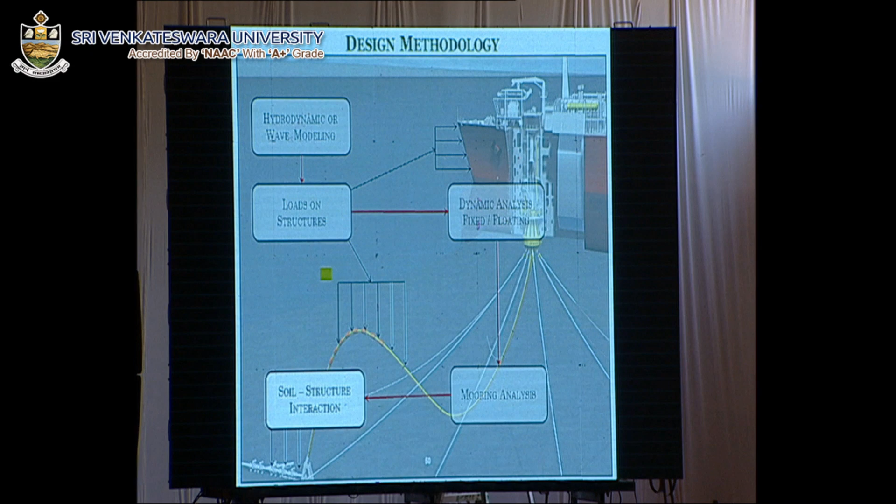This is the facility of the ministry, at a cost of 600 crores. We don't know when the government will give the money. Once it comes, on the offshore part we will be self-sustainable. We need not depend on any foreign countries.

Right now, any testing which has to be done for offshore, ONGC goes to other countries. Each and every testing costs somewhere around 2 crores. If we build this facility within the country, this cost can be cut down, and in-house expertise is developed.

To conclude my section, I think we know very well that if you want to reduce fossil fuels, the only alternative is renewable energy. India has abundant renewable energy sources which can contribute to a reduction in dependency on fossil fuels. R&D activities in wind energy technologies over the last two decades have improved significantly, which reduces production prices on par with conventional sources of energy.

Government interventions in the offshore wind energy sector can ensure commercial viability of these projects, which Dr. Katyal was already mentioning. Initially we may require incentives, but later you don't require anything - automatically the project itself will take care of that. Commercial viability studies for Rameswaram and Kanyakumari show promising results, supported by NIWE data.

Coming to the actual implementation of offshore blocks, MNRE - I think NIWE is the agency which coordinates for the offshore blocks, which Katyal has already shown. One of the important key components for offshore wind development is identification of suitable wind turbine technology, which NIWE has very good expertise on.

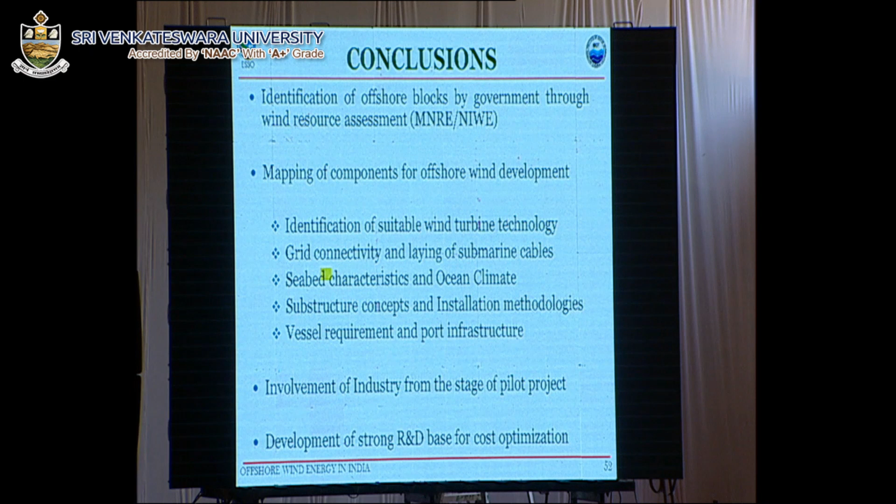Involvement of industry right from the stage of the pilot project - that's what we are getting involved with Suzlon in supporting all these things. We closely work with Suzlon and the development of a strong R&D base for cost optimization, whether on the turbine or even in the installation. On the offshore part, you need to worry more about the installation, which I already showed.